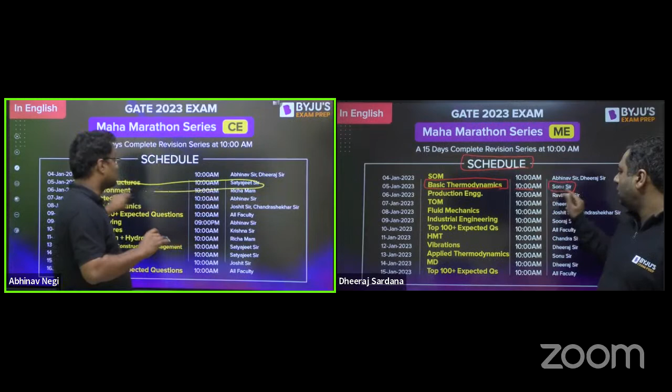Today we have taken the session, and tomorrow Sonu sir will be coming at 10 AM. Satyajeet sir will also be coming at 10 AM tomorrow for steel. Complete steel today, because 12 AM is already done, so it will be completed today, and Sonu sir's session will be tomorrow morning at 10 AM.

Now, after this, these are all the topics that we have covered, and from these topics only we will be taking the numericals.

But before that, the announcement of 2 students. Let me tell you, there are various students here - Deepak, Swapnil, Prashant, LSAT, Yadav, Negi Saab, Pratiksha, and various other students.

I have taken the screenshot. By the combined reason of me and Dheeraj sir, there are so many students - Akash, Priyam, Teju has given so many answers, Smart, Shashank, Banod, Dinesh - these are the students who got maximum answers correct. Revati, T Lover, Bhaumik, Tiksha, Umar, and various students here, more than 40, 50, even I cannot name them all.

They are all champions. To be very honest, I already told in the morning that we are not computers, we cannot even exactly calculate your time, but still, instead of one, me and Dheeraj sir have taken 2 students. You have to mail your details.

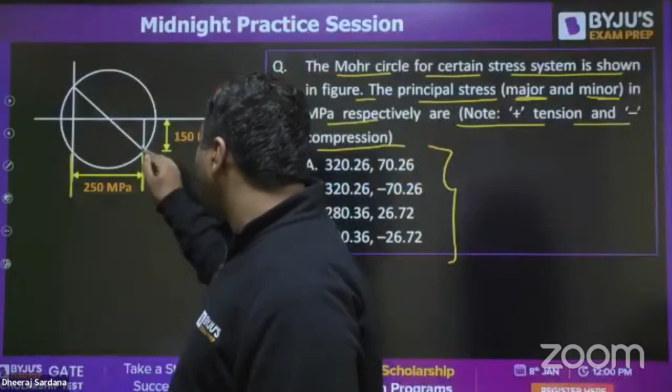So guys, here is the first question in front of you from the Mohr circle. This is the topic I have taken for the larger time today. You can see this Mohr circle is given to you, and the question states the Mohr circle for a certain stress system is shown in the figure. Find the principal stresses, that is major and minor, in MPa, with plus for tension and minus for compression. These are the four options. You can see this distance is given as 250 and this distance is given as 150. So you need to find out the principal stresses sigma 1 and sigma 2.

Let us see how many of you give the right answer. I am looking in the comment section. I feel some of you have started answering as well. Ashish Sharma is saying D. Hello Amir, great, great, thanks Ramesh Mohan. So Junaid is saying B would be the answer. Ashish Sharma is saying D is the answer. Okay very good, what about others?

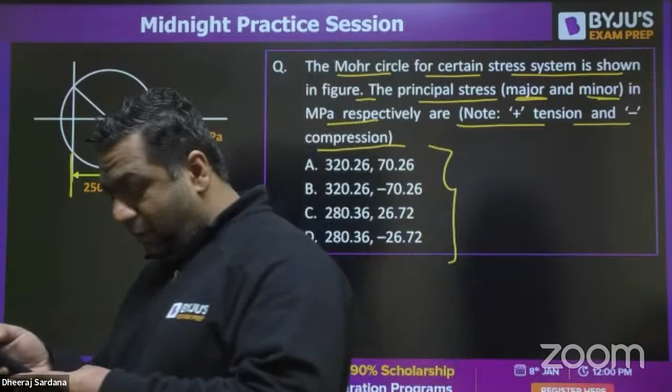Mekala Shekhar is saying B is the answer. Mayur is saying B is the answer. Kalyan is saying B is the answer. Deepak B, Minhas B, Sumit B, Vishal B, Adnan B, Akash B, very good. Manas very good, SK very good, Ramesh Mohan very good. So guys, majority of you have given the answer to be B. Some of you have also given A and D also. So I would like to say the B answer is correct.

So how will you be solving it? You know that if this distance is 250, obviously the half of this is going to be 125. So you can see this is the center of the Mohr circle. The center of the Mohr circle has the coordinate sigma star comma 0. So we know the value of sigma star, that is 125 MPa. So my dear, if we already know this, we need to find out the radius of the Mohr circle.

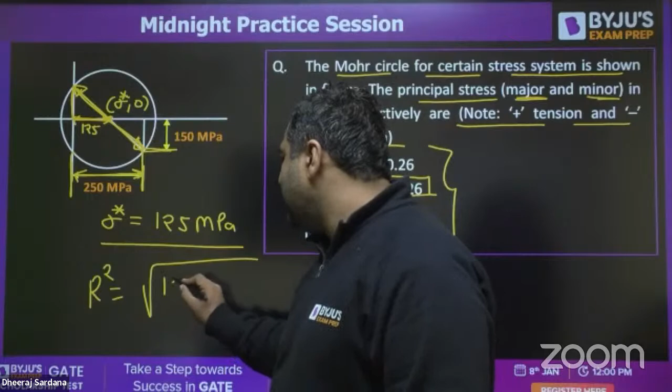So this radius we need to find out. You can also take this point, it's the same. To get this radius, you can use this triangle and apply Pythagoras. So r square is equals to 150 square... the height is going to be same because tau xy and tau yx are same. So we would write 125 square plus 150 square. After doing this, you would be getting the value... let me check... 195.256. So this would be coming out to be 195.256 MPa. This is the value we are getting for the radius. Square root of radius square, square will get cancelled out, and you will get this to be the radius of the Mohr circle.

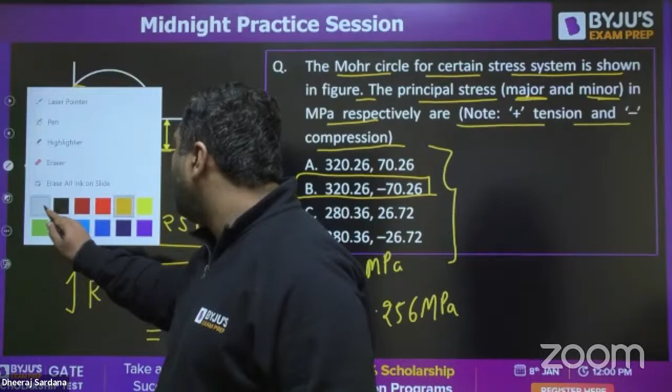195.256 MPa. So my dear, once we get the radius of the Mohr circle, you know what we need to do. If you add the radius to this 125, you would be getting the principal stress 1, because where the Mohr circle cuts the x-axis, you will get the principal stresses there. So the maximum principal stress you would be getting here. And similarly, if you subtract the radius from this sigma star, you would be reaching sigma 2.

Because the extreme point of the Mohr circle, where it is cutting the x-axis, will give us the principal stresses or principal plane. So sigma 1 would be sigma star plus radius, and sigma star minus radius - that also we have seen today.

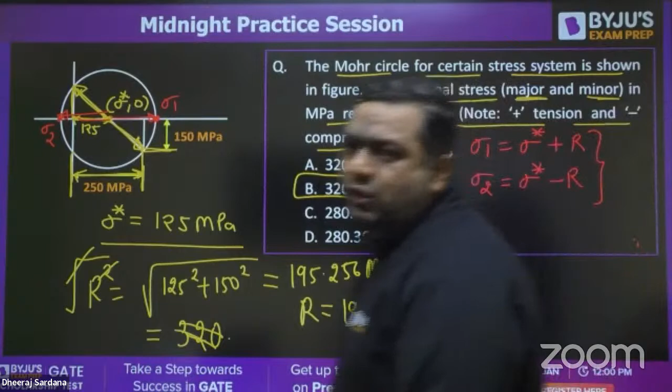So this is also a kind of check on what you have learned from today's marathon session. When you solve this, you would be getting 320.26 and the second answer is minus 70.26.

The student who has just a small idea that principal stress comes at the extreme point of Mohr circle will not answer it as A and C, because one principal stress is positive and the other is negative. So the answer could be either B or D. After calculation, we get to know the answer is B. Majority of you have given the right answer.

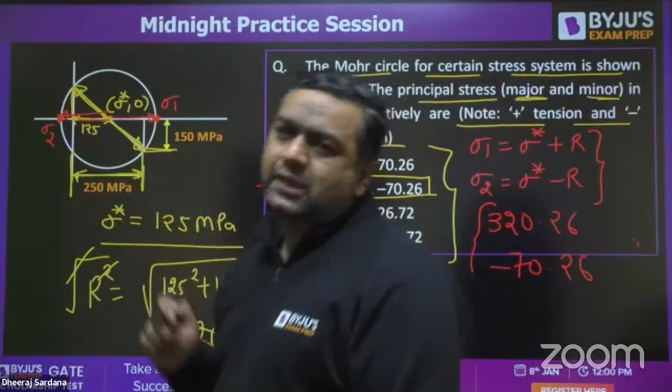So guys, let me check one more thing for this question. If I ask you whether the plane of pure shear will exist or not for this case, what would be your answer?

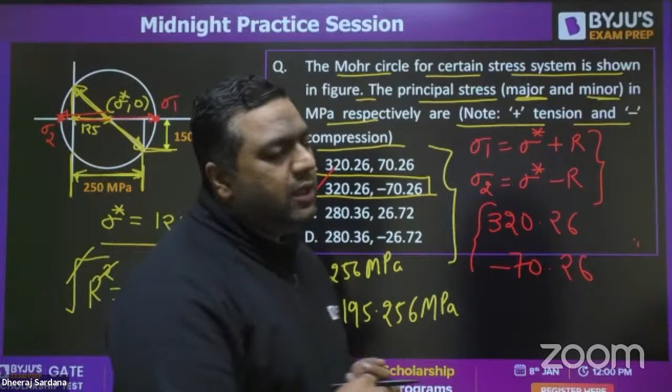As I already told you, if principal stresses are of opposite nature, then we are going to have plane of pure shear existence also. So everyone of you has given the right answer.

That's really nice. This is the second question from deflection, and after me, Abhinav sir would be taking the next two questions. This question has a cantilever beam where you need to find out the deflection at point A. This is point A, this is point B, and this is point C. You need to find the deflection at point A.

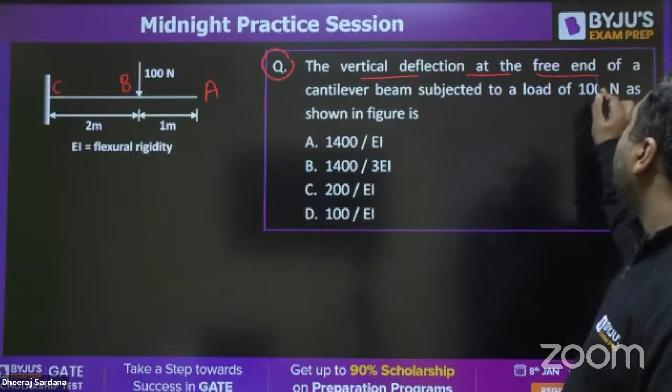So the vertical deflection at the free end of a cantilever beam subjected to a load of 100 Newton as shown in the figure. Let us see how many of you give the right answer for this.

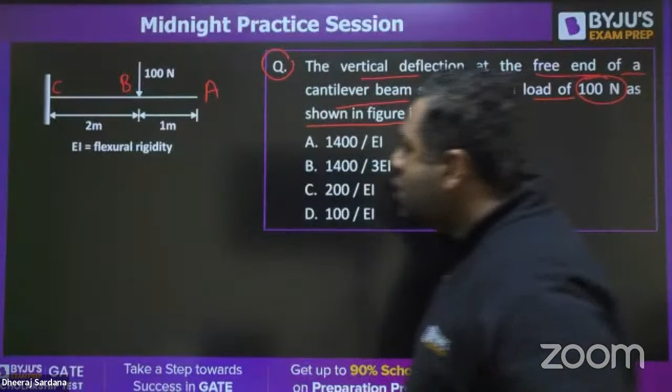So we are starting, guys, how to solve this question. You know that from A to B, there is no load. So if I ask you, from A to B, as there is no load, no bending moment is there. So the deflection diagram for AB is going to be a straight line. So if you say how the deflection curve would be made, it is going to be like this. As there is no load between A to B, we can say the slope of A equals the slope of B - yes, it is going to be.

So if you want to write the deflection of A, you can see the deflection of A has one component which is the deflection of B. To find out this part, we can write theta at B into AB. So you can say deflection at the free end will be deflection at B plus theta at B into AB.

As you know, when thetas are very, very small, we can definitely write them in this way. So when you put this value y at B, you can write this is going to be minus P, then the length for that would be BC, PL cube upon 3EI - this is going to be the first thing.

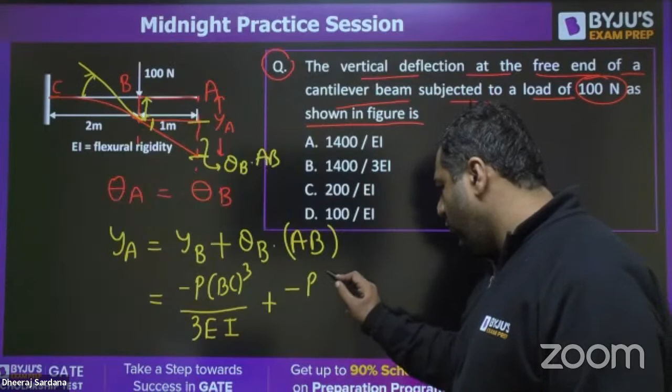Then you would be having plus theta B, that is minus. Why minus? The slope is going to be clockwise, and clockwise we consider as negative. So it's minus of PL square upon 2EI, and that is going to be into AB. So when you put the value of AB, BC, and the value of load, you would get the answer to be 1400 divided by 3EI. So B is the right answer.

I feel everyone has given the right answer, and I'm really happy with how you guys are answering. Very good, Abhishek, Mayur, Vishal.

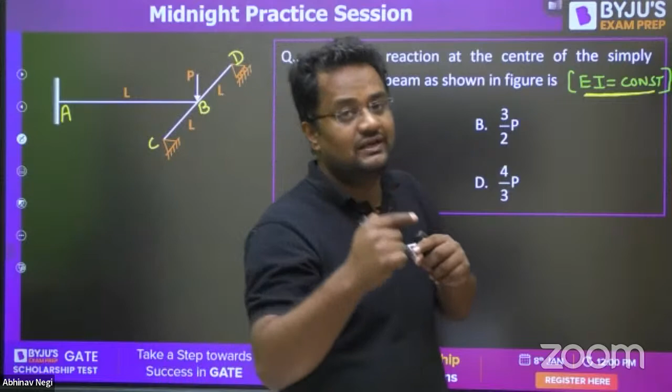Coming back to this question, as I told you in the session, deflection will be understood through the problem. So here, AB is a cantilever beam, and below this is simply supported. This is cantilever, that is AB, and this is simply supported. Now if I make the free body diagram of AB, EI is constant, then here is a P force on this.

This beam from the bottom is cantilever, and in the cantilever there is some force P. This hand is cantilever, and the simply support will push it upward. This will push the simply support downward - like I am putting 80 kg downward to the floor, and the floor is putting 80 kg upward. So here there is reaction R, and to beam CD, simply supported C and D, this R will be downward.

Now moving further, this point is in contact, so if this hand is going 3 mm downward, this point is also going 3 mm downward. The deflection of both these points where they are joined is the same. Now, deflection of B point - what is the deflection of B point? P minus R, length is L, cube by 3EI. Standard deflection formula for cantilever, PL cube by 3EI at the free end.

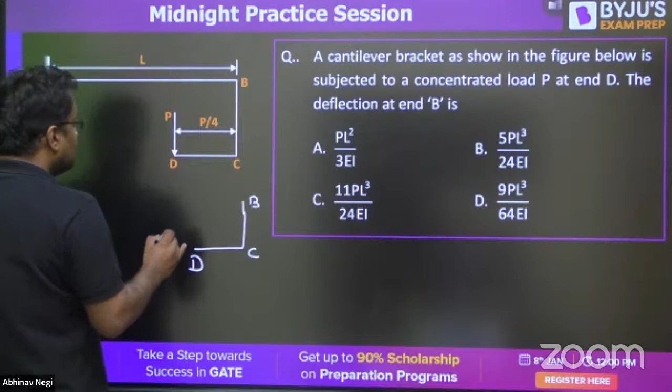Okay, this is P force and this is L by 4. When Dheeraj sir was solving the question, I found this misprint here. At that time I didn't know how to rub this, so I made it black color and did this. So this is L by 4.

So making it balanced, if I take this portion of the beam out, P force downward, so P force will be upward here as internal forces - morning I told you about internal forces. P into L by 4 here, so it will be P into L by 4 like this.

Now if I make the free body diagram of another part, AB - internal force, I told in the morning, is equal in magnitude and opposite in direction. So P upward, here P downward. And here PL by 4 is clockwise, so here PL by 4 is anti-clockwise.

As we know to do these kinds of things, no need to make two free body diagrams like this. We can directly shift it here, P downward. Moment is like this. Now what is asked?

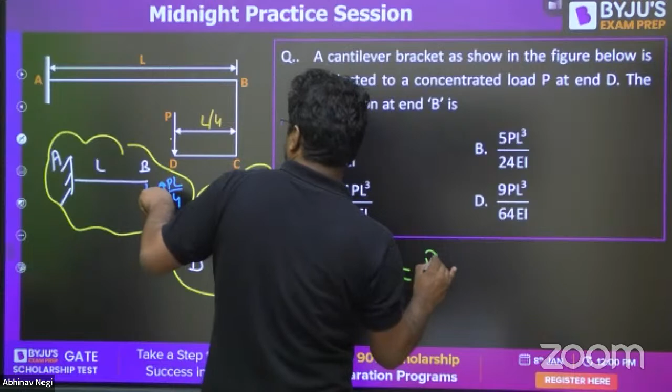Deflection of point B. Now deflection of point B due to this P is PL cube by 3EI. Please check, guys, when you're applying this formula, check if it is L, 2L, or 3L - not always PL cube by 3EI. If the length is 3L, then it will be 3L whole cube.

Now due to this moment, it is going upward. Due to this downward load it is going downward, but due to this moment it is going upward, ML square by 2EI. So minus PL by 4 into L square by 2EI.

Now what you do here, take PL cube by 3EI common. Now taking this common, here it will be 1 minus... take PL cube by EI common.

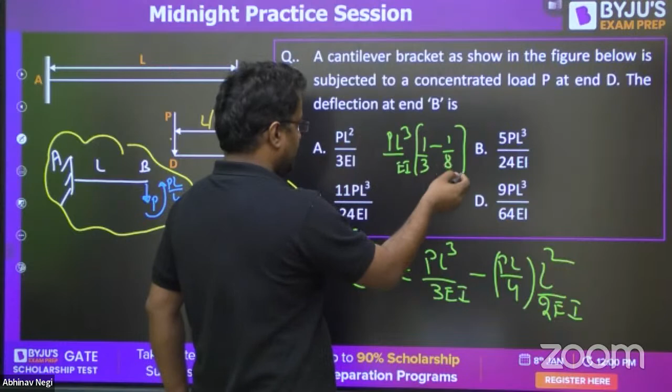So here it will be 1 by 3, and here it will be PL cube by EI common, 1 by 8. So 1 by 3 minus 1 by 8. LCM will be 24, so 5 by 24... yes, B option.

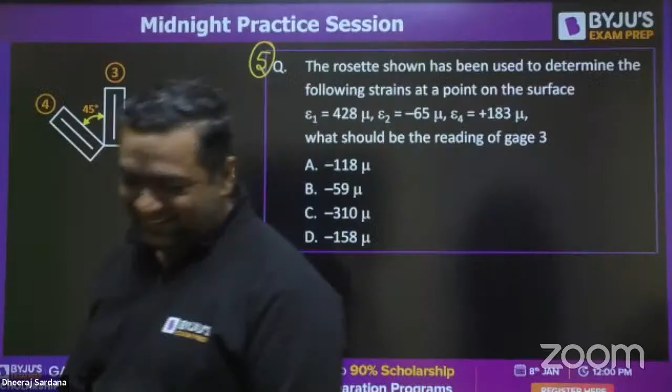Okay sir. Yes guys, what would be the answer for this question? This is question number 5, and this is from strain gauge rosettes. The rosette shown has been used to determine the following strains at a point on the surface. What should be the reading on gauge number 3?

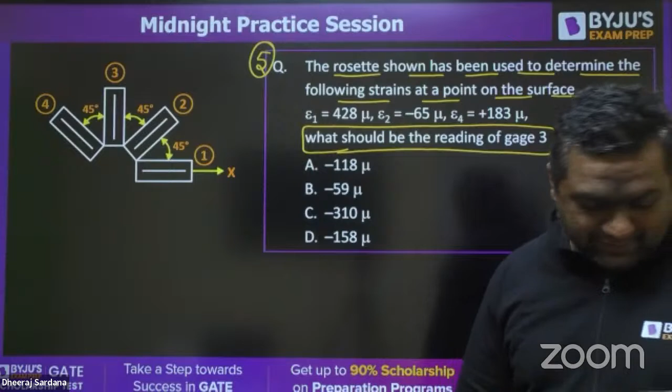Tell me the answer, guys, what would be the answer for this question? Govind is saying C would be the answer. Okay, Shubham is also saying C as the answer.

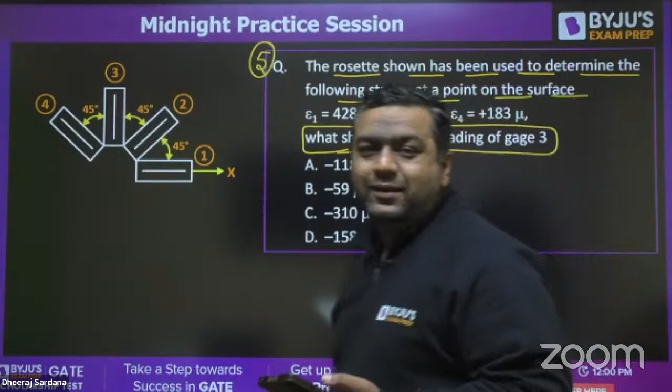Now please tell me, is the voice clear or not? Yes, that's right - Swapnil, very good. Mayur, Neeraj, Ajay, very well done. Yes, waiting for others, only 5 to 6 students have answered. Very good, Vishal Sharma, very well done. Great, Junaid, very good. Prince, very good. Mikala, very good. Yes.

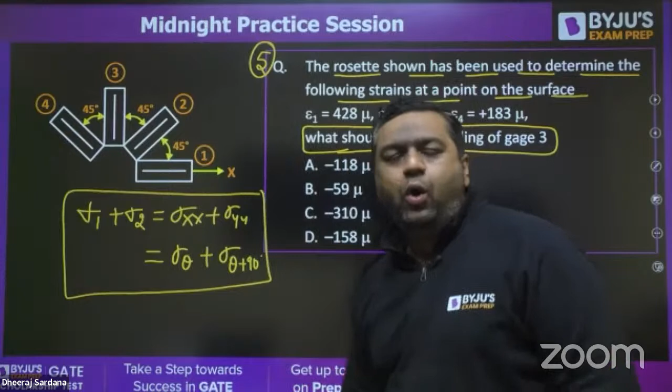So guys, when I was taking the Mohr circle and principal stresses part today, you have seen one thing, that sigma 1 plus sigma 2 equals sigma xx plus sigma yy, and then sigma theta plus 90. The summation of normal stresses on two perpendicular planes always remains constant. So here also, 1 and 3 are perpendicular, 2 and 4 are perpendicular.

And you know, every relation we have derived for stress is valid for strain also. For normal, you can directly replace sigma by epsilon. And for shear, you can replace it by gamma by 2. So you can write epsilon 1 plus epsilon 3 equals epsilon 2 plus epsilon 4, because 1 and 3 are perpendicular, 2 and 4 are perpendicular.

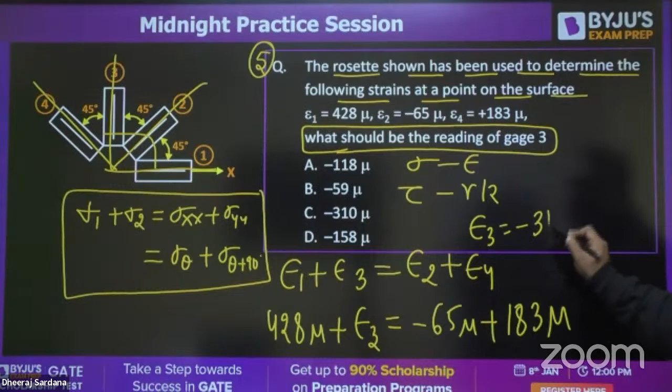So epsilon 1 is given as 428 microns. Epsilon 3 you need to calculate. Epsilon 2 is given as minus 65 micron, and epsilon 4 is 183 microns. So you would be getting epsilon 3 to be minus 310 micron. It was an easy question if you know this wonderful concept. That is why I was saying it is going to be very important, and you need to be ready for that.

Wonderful. So votes are also there. Great, great, great.

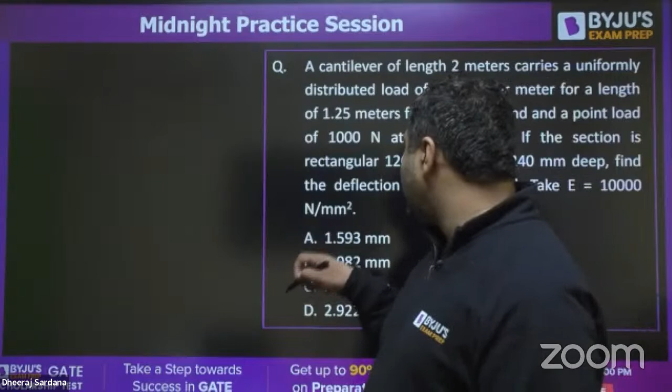This is question number 5. So moving to question number 6. Guys, I feel this question is once again from deflection, question number 6. So as deflection sir has promised, we are fulfilling the promise. One more question is there.

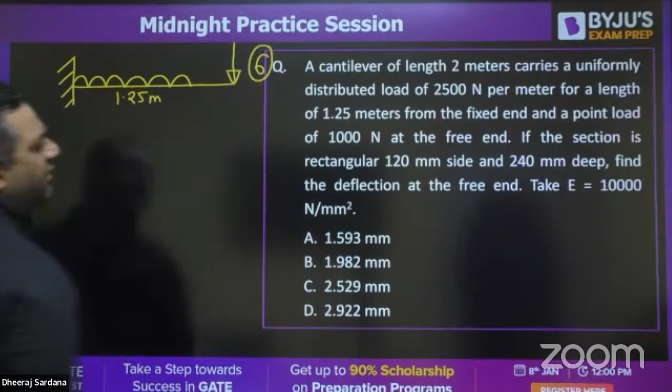A cantilever of length 2 meters carries a uniformly distributed load, a UDL like this, of 2500 Newton per meter for a length of 1.25 meters. It is also having a point load of 1000 Newton at the free end. This is nothing but 2500 Newton per meter, given to you. And they are saying if the section is rectangular, where 240 is the depth and 120 is the width, you can find I is BD cube by 12, and if you want to find Z, that is BD square by 6.

They are asking to find the deflection at the free end. So you can see here we need to apply which method, which principle, and just do it. This is slightly more calculative, but this type of question comes from deflection sometimes, so for that purpose we have taken this.

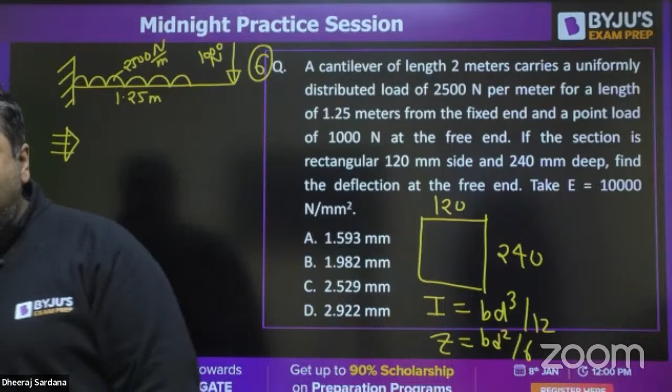Ajay is saying the answer to be B. What about others? So my dear, I would like to give you a hint there. You need to apply the principle of superposition. First of all, you need to find out deflection due to this force P, which is 1000 Newton.

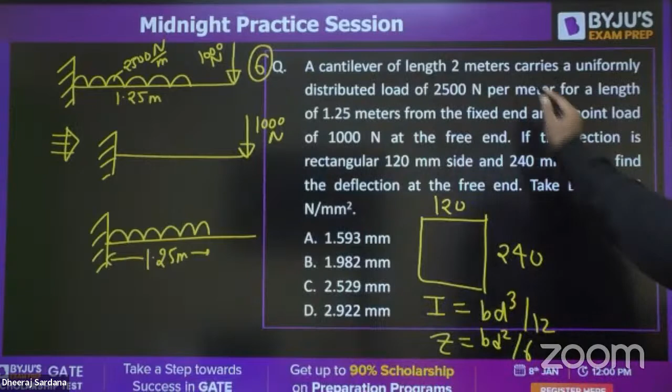Then you need to find out the deflection due to this UDL, for a length of 1.25 meter, and the total length is mentioned as 2 meters. So obviously for the rest of the length, 0.75 meters, there is nothing. You need to find deflection at A because of this point load, then deflection at A because of UDL, then take the summation of that. That is called the principle of superposition.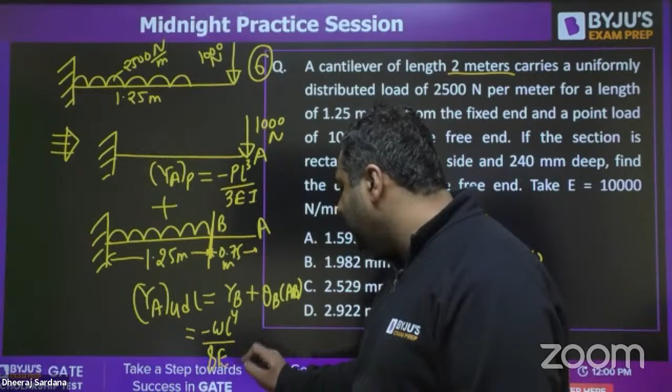Here you would be using minus PL cube upon 3EI, that is the formula. And once again, this is similar to the previous question I have taken. If this is point A and this is point B, you write this as deflection at B due to UDL plus theta at B into AB. Due to UDL, it is minus WL4 upon 8EI, and minus WL cube upon 6EI, into the length, which is AB. But I would like to say for this length is 2 meters, but for this length is 1.25 meters. So this question will give you a feel of the convention the student was asking for. Just solve it.

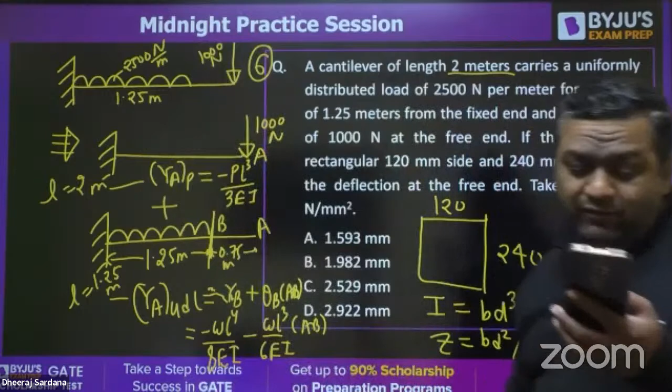Wonderful, I feel some of you have already answered it. Great, great, great, Ajay, I feel you found your mistake. So guys, you are doing really fantastic. The time which I have used to write the formulas, you have just calculated, and I would like to say everyone, the answer is correct. 2.922 is the right answer. Everyone has given the right answer, so that's really fine.

So this was question number 6. So I feel Abhinav sir, your turn has come.

Okay guys, this is a previous year question, but I'll modify it a little bit. Here, this is the shaded portion, and it is asked what is the force here, but I'll just modify it slightly.

First, if I draw the bending stresses, this is causing compression at the top. So the neutral axis will be the centroidal axis. This is 150, so neutral axis will be here, this is the neutral axis, the centroid. Above is compression and below is tension.

Now we want to find the force here. So what is force? Force is stress into area. What is area? Area is 25 into 50.

What is stress? At this level the stress is somewhere here, sigma, and at this level stress is 0. So it's 0, then increasing gradually until sigma. So it will be 0 plus sigma by 2. Since it is linear variation, only then can we do this. Otherwise we'd have to find the volume of the stress prism. So it's 0 plus sigma by 2 into this.

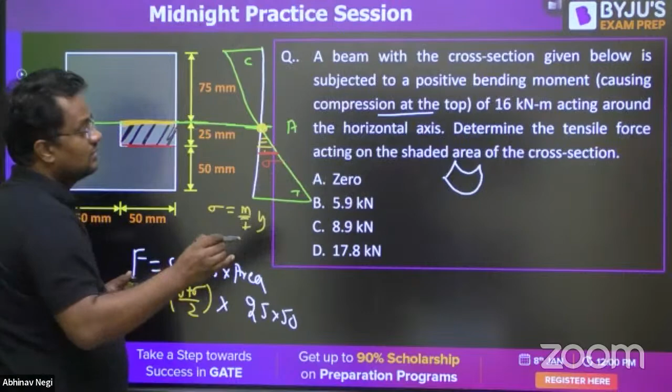So what is sigma? I told you in the morning, M by I into y. What is M? M is this. What is I? BD cube by 12. So B is 100 and D is 150, cube, by 12. And y is the distance from the neutral axis, y is 25. So sigma is M, that is 16, I is BD cube by 12, converted into proper units, into y which is 25. From here sigma comes out to be 14.22 Newton per mm square, and this value you will get as 8.9 kilonewton.

This is a PYQ, I wanted to change it a little bit, so I am changing it. I want to find out the stress at this dotted portion now, not the shaded portion. I want to find out the stress here in the dotted portion.

Can you do this? Yes or no? Just tell me, I'm not asking for the answer yet. Can you do this? Again, the force is stress into area. Just let me know in the comment section. So area is, this is 50 and this is 50, area is 50 into 50.

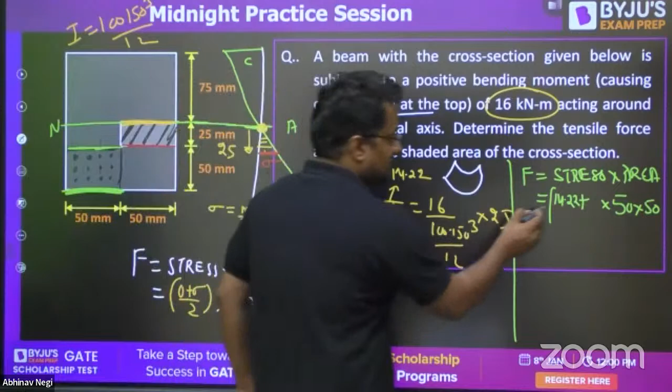And stress, guys, here at this level the stress is 14.22. At this level it is sigma max. So it will be sigma plus sigma max by 2, like this.

Are you getting this, in this 50 into 50 area? Here the stress is 14.22, that is sigma, and here the stress is sigma max. You can find this by similar triangles also, by 2 into area, or you can find it by this formula.

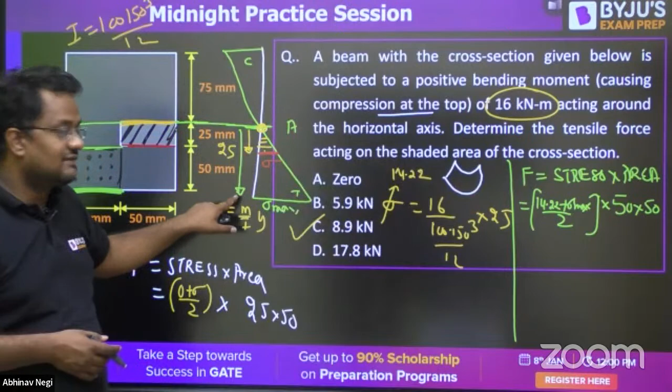M by I, M is same, I is same, but y here is 75. So it will be 3 times, because here I was multiplying with 25, M same, I same, and here I'll be multiplying with 75, or by similar triangle you can find the value. Got the concept, guys? Everybody, have you got this?

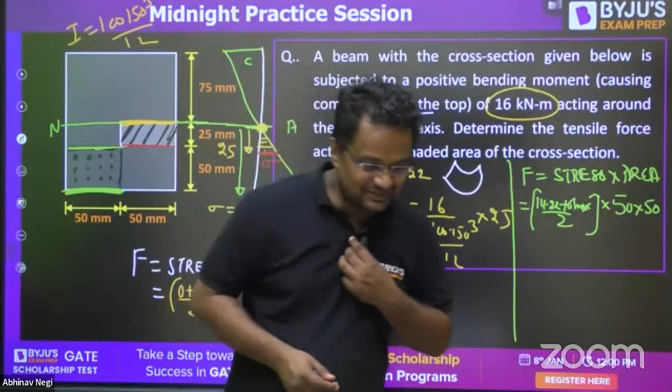Okay, now moving here to the next question, as we promised that we'll be doing more deflection questions.

This is A, this is B, this is A, this is B, and here this is C.

Like this, this is B, and this is C. Now this will be pushing reaction here upward if I break it, and this will be reaction R downward. But point B is same. So in this part...

What is deflection of B due to UDL? W L4, L is 4a. 4a to the power 4 by 8EI minus RL cube by 3EI. R will be pushing it upward. RL cube, 4A whole cube by 3EI.

This is equal to, in this part, what is the deflection of B? Downward I am taking as positive, upward I am taking as negative.

So this R is downward. Here the only mistake students make is in sign convention. R is PL cube by 3EI, I am again saying downward. This W is putting it downward, so I take it as positive. This R, the upper R, is putting it upward, so I have taken it as minus. So in this green portion, this R is putting it downward, so plus, and this W is also downward.

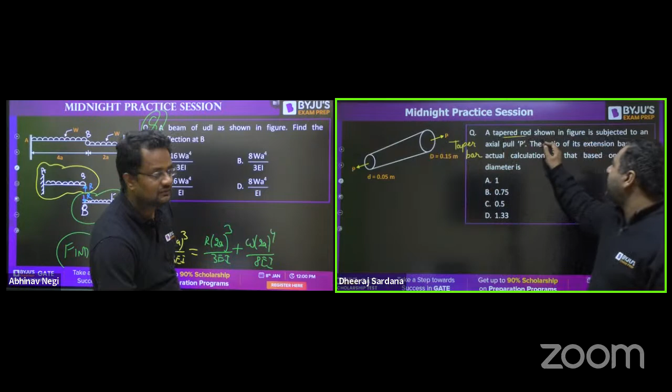So guys, let's change a bit now, enough of deflection. Now let us see the question on the taper bar. This is the question from taper bar: a tapered rod shown in the figure is subjected to an axial pull of P. The ratio of its extension based on actual calculation to that based on average diameter - find the ratio of delta taper to delta prismatic.

There are two considerations. One is in front of you, that will give you delta taper, and the second, by mistake, if we consider a prismatic bar of average diameter. What do you mean by average? If this diameter is D1 and this is D2, average would be D1 plus D2 by 2. So you need to find out the elongation.

Today only you have seen this concept also in the morning session. So let us see how many of you give the right answer for this one. Great, wonderful guys, I feel majority of you have already answered it.

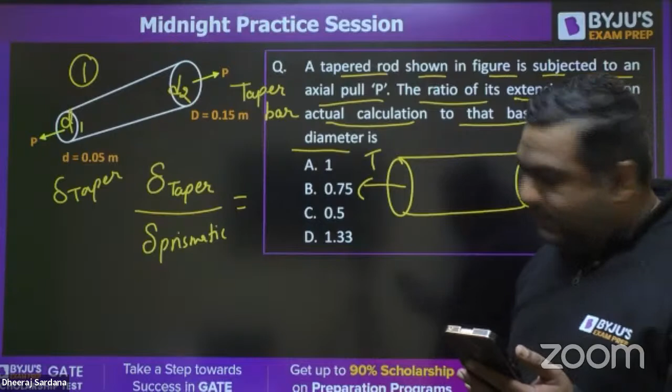A, very good. Ajay is saying D. Some are saying A, some are okay - A is for the previous one. For this, the answer is D. Very good, wonderful - Manas, SK, Vishal, Swapnil, Mayur, Ramesh Mohan. Very good, I feel everyone has given the correct answer. D is the right answer.

So you know the formula for delta taper - it is 4PL upon pi E D1 D2. And you know the formula for delta prismatic - it is 4PL upon pi E D square. So guys, you need to take the ratio of them. Load is same, length is same, and only the difference is in diameters, where D1 and D2 are given to you.

D1 is given as 0.05, D2 is 0.15. And what would be the average diameter? Average diameter would be 0.05 plus 0.15 divided by 2. So the ratio comes out to be 4/3. D would be the right answer.

Really wonderful, guys, very good. Majority of you have given the right answer. Very good Neeraj, very good Manas, SK, everyone.

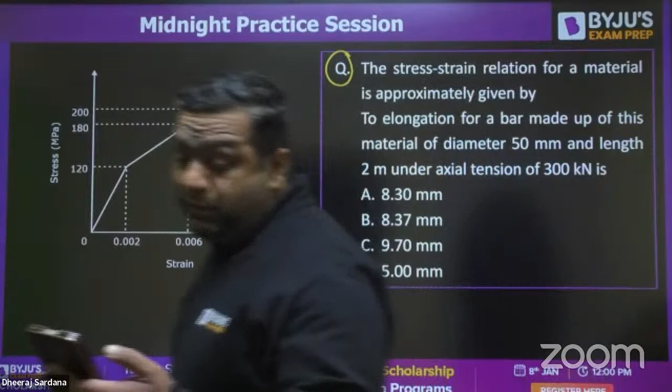So guys, now this question I have taken 2 to 3 times before also, but my dear, from the stress-strain diagram, it is the best question I found. That is why in this session also we are doing it, because this type of question has appeared in previous years' GATE questions also. So guys, this is a wonderful question, let us see how many of you are able to answer it.

The stress-strain relation for a material is approximately given by this. Then he is saying to find the elongation for a bar made up of this material, of diameter 50 mm and length 2 meter, under axial tension of 300 kilonewton.

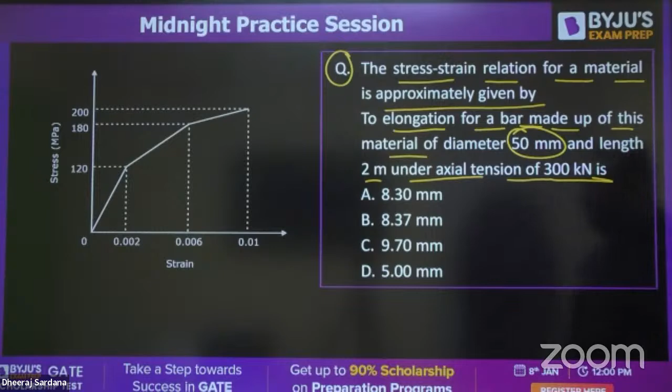So my dear, you need to solve, you need to find out the elongation. Let us see how many of you give the right answer for this. Those who know the concept, they can try. Those who do not know, I am telling here. First of all, find out the value of stress, which is force by area.

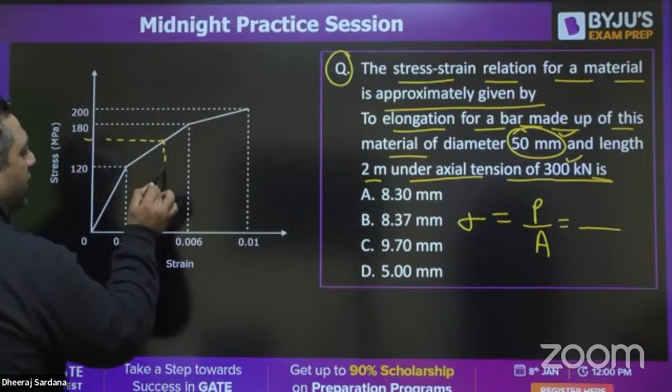They have mentioned the load, they have mentioned the diameter. You can find out this value of stress. This value of stress would be coming somewhere here. Corresponding to that, you would be having this strain also.

Then my dear, you can use the similar triangle concept where you are having two triangles. One triangle is this yellow one and other triangle you are having this green one. So using this, you know this value, you know this value, you can find out this one. So once you get this one, you can find out the total value of strain.

So once you would be getting the total value of strain, then delta L upon L is the strain. You can use it and you can find out the deformation also. How you can find out, because this is known to us now. So you just need to find out this, then you can add this one. So just to solve it, guys, and you would be getting the answer for that.

Let us see how many of you give the right answer. So I have given the concept. Very good, Deepak has said the answer to be 8.37 mm. What about others?

So guys, you guys are really doing nice. Vishal Sharma is also saying the answer to be B. What about others? Manas, SK, Swapnil, Shubham is also saying the same. Swapnil same, Neeraj same, Shubham also same. Very good, guys. Very good. So Mayur, are you trying it or not? SK, very good, very nice job. Ajay, very good, guys. Very good.

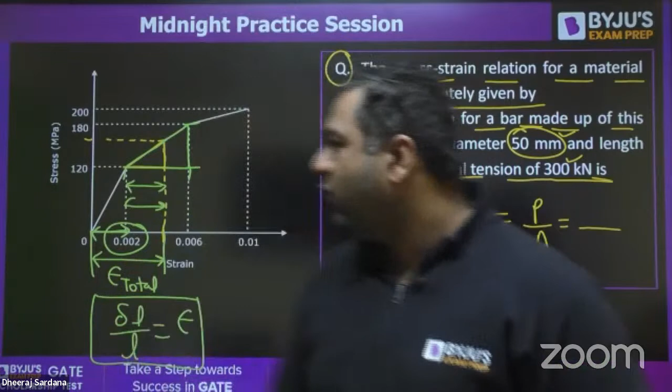So first of all, when you would be finding out this value, sigma, you would be getting a value around 152 or 153. After getting this value, you can use the similar triangle concept and you can find out this strain. Once you get this strain, you can add this 0.002 into that. You can find out total strain. After that, you can find out the length and you would be getting the answer to be 8.37 mm. So that answer is really correct.

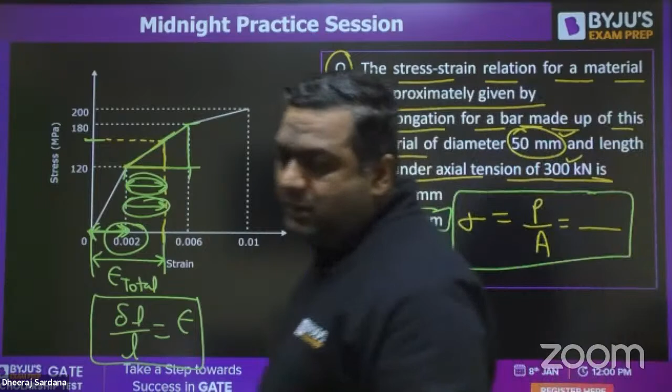Very good, Junaid. So I feel, sir, I have done these two questions. Now, once again, it's your turn.

So from where will the upward reaction come? Okay, so guys, from where will the upward reaction come? There is no support, no simple support, no fixed support. So guys, the upward force will be coming from the buoyancy, the water force, the water thrust, that will be acting as a UDL. And if this total is 80 Newton, okay, so this UDL will be over 2 meters. So this UDL intensity will be 40 Newton per meter. If it's 40 Newton per meter, then only in 2 meters, it will be 80 upward.

Then balancing. Now, if I make the SFD for this, guys, you can see my method and Dheeraj sir's method, both are the same, just in a different way. It's something like you are saying Delhi or Dilli, both are same. So you can see my method or sir's method, both are same.

So UDL is upward. Those who have studied the AN method, SFD, BMD from me, positive and constant, positive and constant like this. Then downward load, shear force will fall. Then upward load, then upward UDL, so positive constant like this. Now this is the SFD and BMD will be.

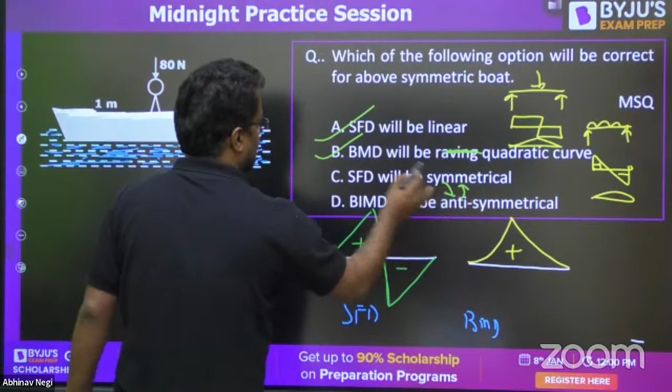Okay, like this. SFD is anti-symmetrical, plus here, minus here, while BMD is symmetrical. This is an MSQ question. Yes, SFD is linear, so BMD will be a quadratic curve. SFD will be anti-symmetrical and BMD will be symmetrical, so only options A and B are correct, not D. BMD is not anti-symmetrical, it is actually symmetrical.

Now, what happened to my marker? Okay, 2, 2, 2. Now, compliance. Just give me quick answers. Again, one MSQ, guys.

Yes, tell me, this is, I guess, question number 12. Okay, sir has taken 6 questions, and this is my 6th question. This is question number 12. Okay, compliance was guys, stiffness.

See, delta is PL by AE, so stiffness is P by delta, which is AE by L. Compliance is flexibility, the opposite of that, the reciprocal, so it will be L by AE. So it depends on length, not load. It depends on length, A, and E. That is B, C, and D. This is question number 12.

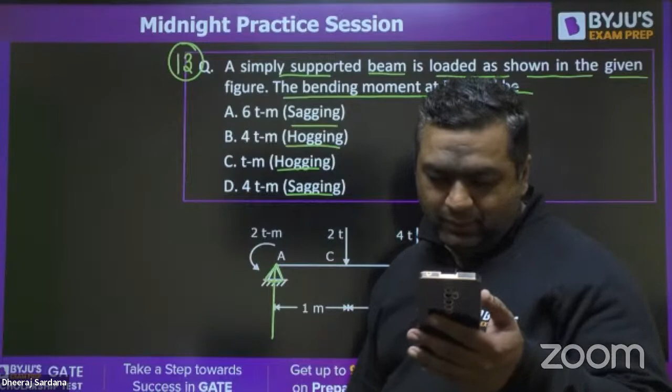Okay, Mayur. So I was thinking, Mayur, you are from civil, but you are from mechanical. That's really great, so you can continue this series with us in the marathon series. Okay, civil, Mayur is saying 4 TM.

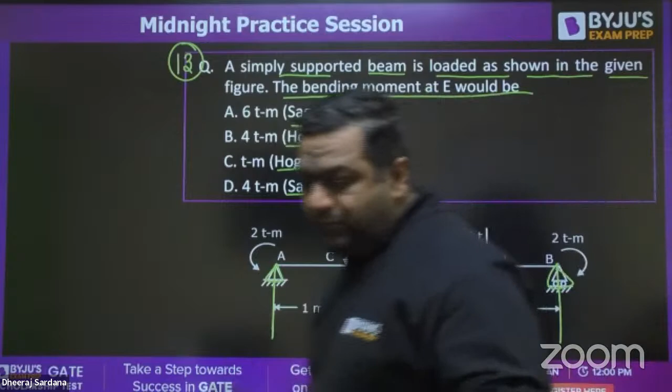So guys, some of you are saying the answer to be D. Everyone is saying D, okay. So guys, first of all, we will be finding out the support reaction. So you know the principle of superposition, you have seen that this 2 TM is making the net moment to be 0, so there would be no reaction because of it. Now we are talking about this 2T, 4T, and 2T.

If you would be finding out the support reaction RA, we are going to use the shortcut. RA is upward, 2T is downward, so you would be writing plus sign 2T, the distance from the opposite end is 3 divided by 4. Then you would be having the second 4T, once again it is upward, it is downward, so you would be saying 4T into the distance is 2 divided by 4. Plus the effect of 2T, you would be having 2T into 1 divided by 4. And you know there is a kind of symmetry also, because of that both reactions are going to be equal, so you can see here 4 is there. 2 into 3 is 6, plus 8 is 14, plus 2 is 16.

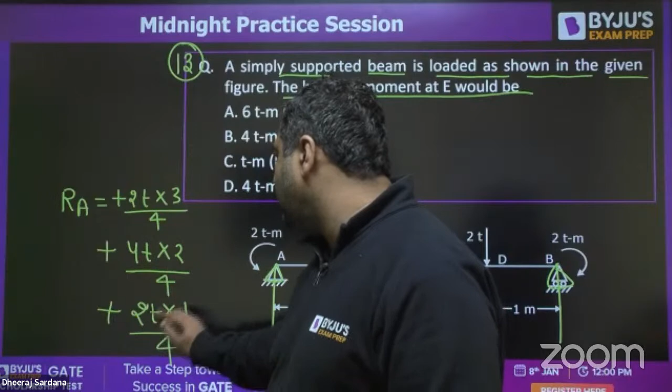So you are going to get RA. You can also write by symmetry RA equals RB. This is 4 plus 4, 8. So directly it could also be written, but I have shown you both the things. Every time symmetry may not be there. So if symmetry is there, you can directly write that the total load would be divided into 2 parts. But if symmetry is not there, you will go by this method.

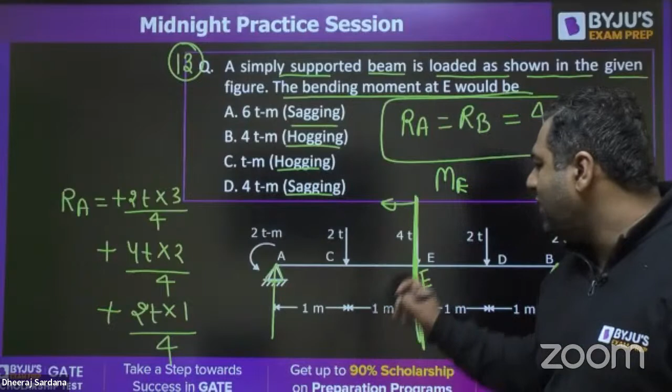So you would be getting 4, 4, and you need to find out the bending moment at point E. If you want to find the bending moment at E, you can take it either from the left or the right hand side of the section. Consider the sign convention: this is for sagging, this is for hogging. So you can see this is hogging, so I would be having this to be minus 2T, minus 2TM.

Yes, if you see from the left, this RA would be creating clockwise moment, so you would be having 4T into 2, so plus, this is going to be 4T into 2, so 8TM. And you would be having one more, this 2T would be creating hogging once again, so 2T into M, so it is going to be minus 2T into M. So the total value would come out to be 4TM.

Positive means sagging, so the answer is D. Really very good, guys. Everyone has given the right answer, I feel.

Yes, Ramesh Mohan, the same I said, by symmetry also we can do it. This is from principal stresses once again, from the Mohr circle. So on the element shown below in the figure, the stress in MPa, the radius of Mohr circle is R and principal stresses are sigma 1 and sigma 2.

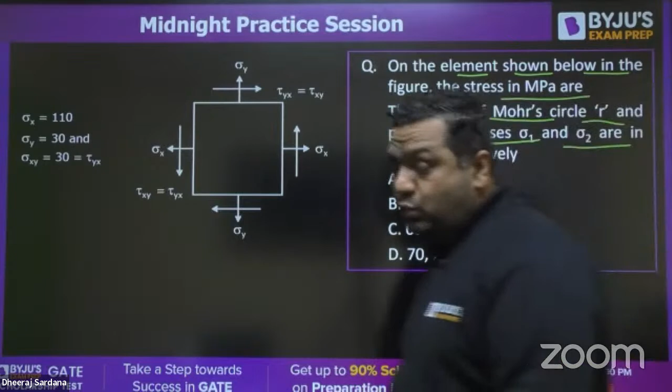This will be a very, very easy question. You are having 4 options, but in GATE every year they are asking from radius of Mohr circle, so taking that into mind I have put this question. Otherwise I know it is easy, but in GATE it is also coming, so we need to prepare for the exam. So tell me what would be the right answer for this.

Yes, very good Ashish Sharma, very wonderful, guys, wonderful. Yes, Teju is saying A. Easy way is saying A. Ramesh Mohan A. Mayur A. Manas A. Ajay A, very good. Shubham A, very good. Wonderful, guys.

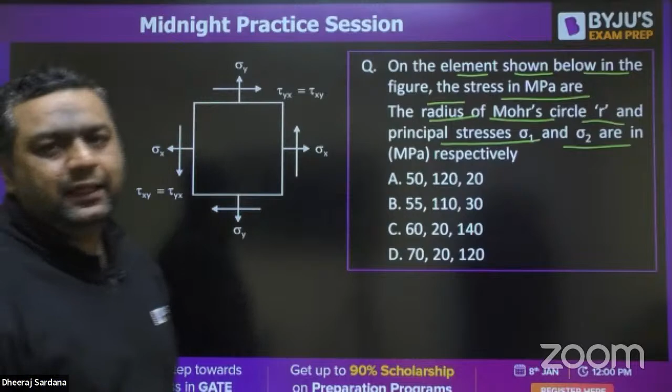Okay, so guys, now I would be telling you how to solve it. Abhishek, Vishal, very good. You can see you are given sigma x as 110, and sigma y as 30, and tau xy also as 30. So guys, the best thing to find out is the radius of Mohr circle, because it is nothing but tau max. And everybody would be remembering the tau max formula from today's session also: sigma xx minus sigma yy by 2, whole square, plus tau xy whole square.

So guys, if you have 110 and 30, you put the value: 110 minus 30 by 2, whole square, plus tau xy which is 30, whole square. The answer comes out to be 50. So if you want to answer only with the radius, you can say the answer is A, because there is no other option which has 50.

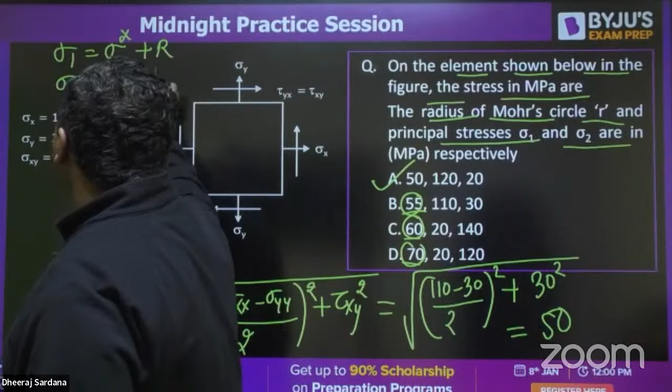But if any other option also has the value 50, then you need to find sigma 1 and sigma 2 also. You already know how to write sigma 1 and sigma 2: sigma 1 is sigma star plus radius, and sigma 2 is sigma star minus radius. And sigma star can be written as sigma xx plus sigma yy divided by 2. So 110 plus 30 is 140, divided by 2 is 70. So you can write this as 70 plus 50 is 120, and 70 minus 50 is 20. So the answer is A finally. I have shown you the calculation for everything.

So I feel this was question number 14. Okay, now Abhinav sir would be coming for question number 15, then I would be coming for other questions. Yes, Abhinav sir.

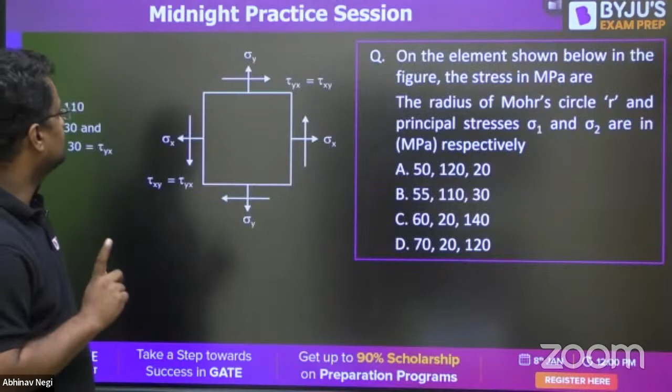The cross section of a beam is shown below, Ixx is this, it is subjected to load as shown in the figure, find the maximum tensile stress. Okay, first of all this is the question — first, draw the shear force diagram.

This is 0.3, it is symmetrical, so both will be 0.3, 0.3. This is SFD, SFD is anti-symmetrical. Now if I draw BMD — negative and constant, graph number 4 as per the AN method, then positive constant like this. So this is the maximum bending moment: 0.3 into 3 meter, 0.4 into distance, giving 0.9 kilonewton meter.

Now what they are asking is the maximum tensile stress, so sigma max as per the flexure formula is M into y max by I.

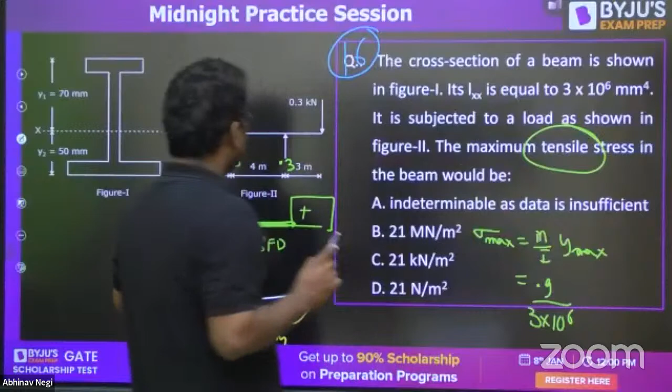So for maximum, I will be putting maximum bending moment 0.9. What is I? 3 into 10 to the power 6. What is y max? They are asking the tensile stress. So it is a hogging bending moment. Negative represents hogging bending moment. Hogging is like this, so tension is at top, here it is tension, here it is compression. So what is the maximum?

We will be finding y of here, not of here. Even here y is more, even here this is only more. But if here it is 90 mm, then only we'll be taking this, because they are asking the tensile side stress. So tensile side y max is 70. Even if here y max is 90, still we'll be calculating this. So this into 70 in proper units, in Newton, mega Newton is 10 to the power 6, you can find the answer. I'm not going into the calculation, guys.

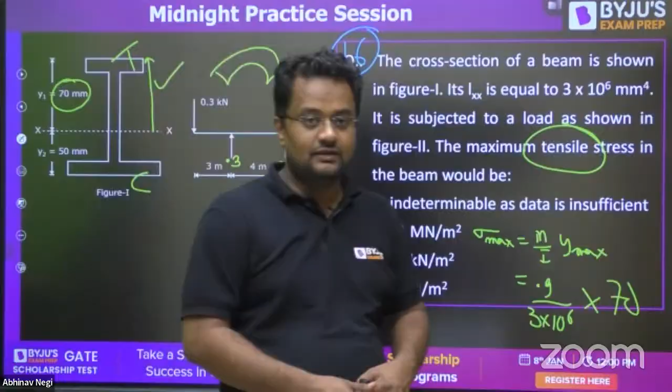Yes sir, so guys, now next question is from columns. Our promise is we'll complete all the topics. So now let's solve the question from column, that is from Rankine load.

So they have given you the Euler load as 1000 kilonewtons, and the crushing load is equal to 1500 kilonewton. You need to find out the Rankine load. So I feel everyone would be knowing that 1 upon PR is 1 upon PE plus 1 upon PCR. If you know this relation, you can very easily find out the Rankine load. This is from column and strut, so you can have this type of question.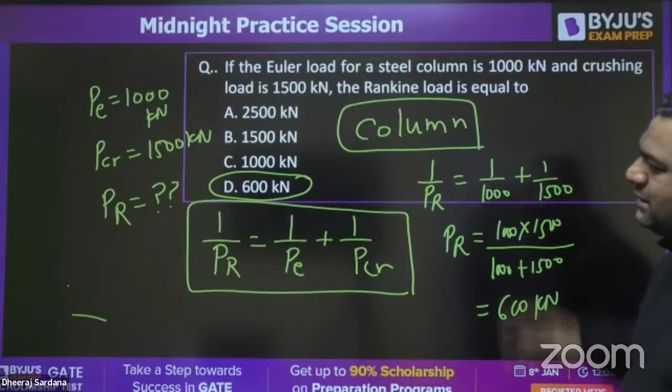So guys, the answer for this is going to be D, that is correct. So you would be having 1 upon PR equals 1 upon 1000 plus 1 upon 1500. So I feel you know the formula for PR would be 1000 into 1500 divided by 1000 plus 1500. The answer would be 600 kilonewton. So wonderful guys, the answer would be D for this question.

Moving to question number 18 now. Question number 18 now is from torsion. So covering all the topics, guys.

Manas, I is BD cube by 12 and Z is BD square by 6, we are talking about XX axis when depth is along the Y. Two shafts having same length, so L1 is equal to L2, same material, G1 is equal to G2, are joined in series and they are subjected to a torque of 10 kilonewton meter. If the ratio of diameter is 2:1, then the ratio of their angles of twist would be - you need to find out the ratio of theta1 to theta2. I feel everybody knows theta is given as TL upon GJ.

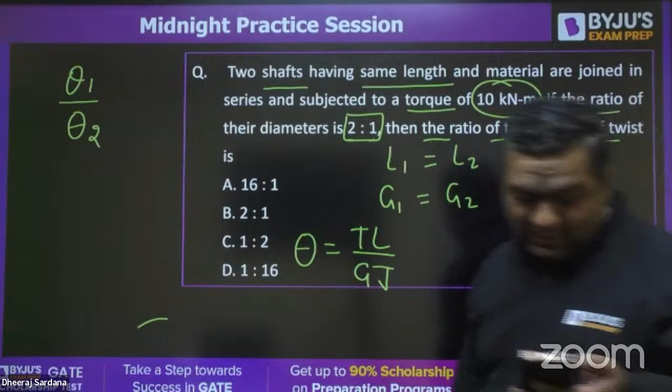This type of questions are more coming in GATE for 1 mark, 2 mark section from torsion. Okay, Teju has given the answer to be D. Very good Mayur, yes. Ramesh Mon is saying D. Mayur, very good, Swapnil, Ashish, SK, very good.

Ashish, very nice guys. So when you solve this, you know theta1 by theta2 - this ratio you need to find out. So theta1 ratio would be T1 L1 upon G1 J1 and T2 L2 upon G2 J2. Since they are subjected to same torque, length is same, material is same, everything will get cancelled out. This would be J2 by J1. So J2 is going to be pi by 32 D2 to the power 4 divided by pi by 32 D1 to the power 4. So D2 to the power 4, D1 to the power 4 - the ratio of D1 and D2 is 2:1, so it's coming out to be D2 by D1 to the power 4, which is 1 by 2 power 4. So I feel D is going to be the right answer for this.

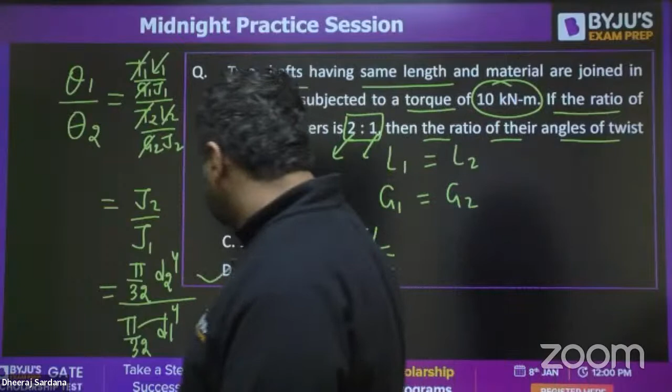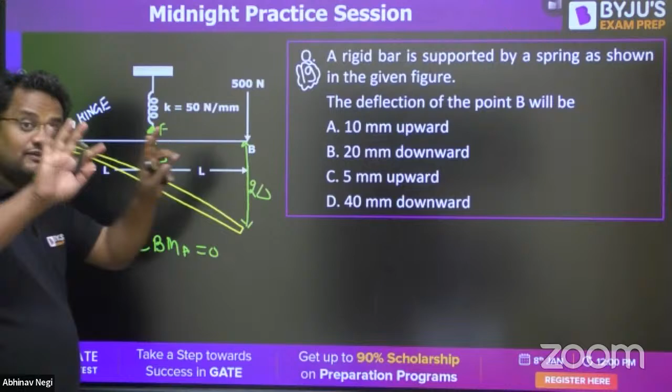Now, since guys, this is a hinge, the spring is pushing it upward by F force. So summation of bending moment about A is 0. At hinge, bending moment is 0. Moment is everywhere 0, guys. Bending moment is a different thing, moment is a different thing.

Just give me 2 minutes, I'll make you understand. Many times in interviews I ask somebody: this is P, this is L, this is B, this is A. What is moment at A? Please let me know in the comment section.

Okay, let me check what students are saying. What is moment at A? Mayur is saying P into L. Ajay is saying P into L. All are wrong. Moment at A is 0.

Bending moment is PL. Bending moment you see from right hand side is PL, and these are the reactions. From left hand side also it is PL. So bending moment at A is PL, from right and left also. But moment at A is 0.

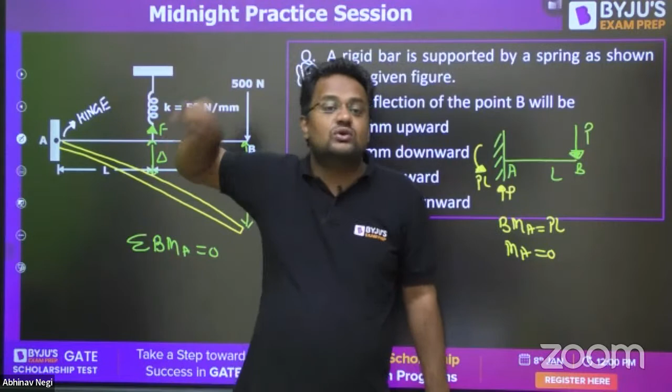Guys, moment at every point of an equilibrium body has to be 0, otherwise it will be rotating like this. Moment is calculated from right also and left also - right PL clockwise, left PL anti-clockwise.

Guys, even moment at every point in an equilibrium body is zero. If at this point C, the distance is x and that distance is L minus x, then moment at C: P into x is clockwise, this PL is anti-clockwise, and then P into L minus x is clockwise. Moment is taken from left and right both, so this is again zero. Moment at every point is zero.

If you still haven't understood, let me tell you one more thing, it is the same, now you will all understand. If this is P force, this reaction is P, so at this section net force is zero. Net force is calculated from bottom also, top also. At this point net force is zero, otherwise it will be accelerating, it will be going to Khandala.

Moment is always zero. So bending moment from right hand side - 500 into this distance 2L, and moment will also be zero here. So 500 into this distance 2L, and this F into L is equal to 0. So F is equal to 1000.

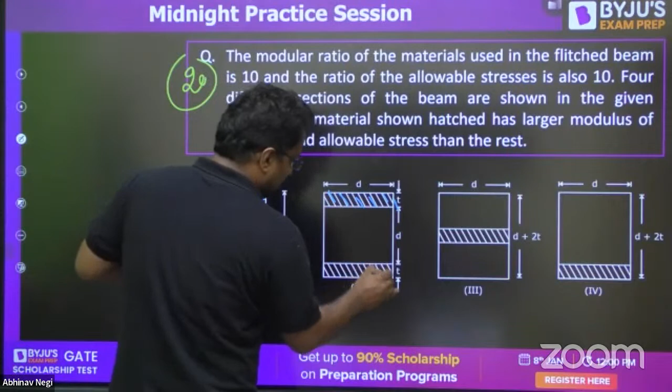This blue one is steel. Steel is stronger, and Young's modulus of steel upon Young's modulus of wood is given as 10.

Now, 4 different sections are there. The material shown, one is larger, that means steel. The question is which is the strongest section in bending?

And let me add one more thing: which is strongest in shear?

In bending it is quite obvious this is worst, because bending stresses are like this: top and bottom more, and at the center very less. Where the stresses are minimum, they are putting higher standard, good quality, stronger material there - worst design by a worst engineer.

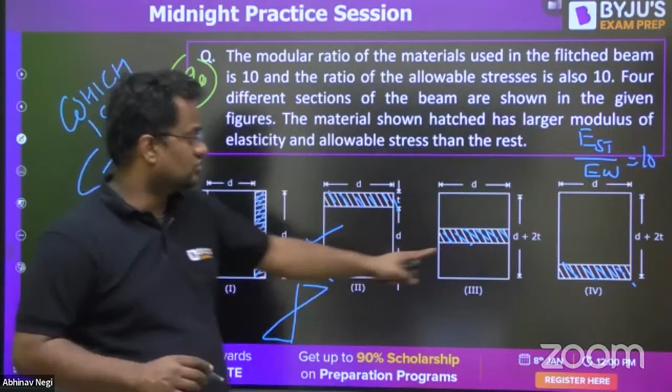The best design is this one. Even this is also not best, because on one side they have provided good material, another side they have not. It is not mentioned as ductile or brittle material. So the best is this - he has provided good material all throughout the section, all throughout the depth.

But all throughout the depth, the stresses are not more. So this is best in bending.

And particularly for shear stress, as I told you, at top and bottom it is 0, and somewhere in between it is maximum. So we can predict that this may be good for shear, because shear is maximum at the center or near about center, not exactly center.

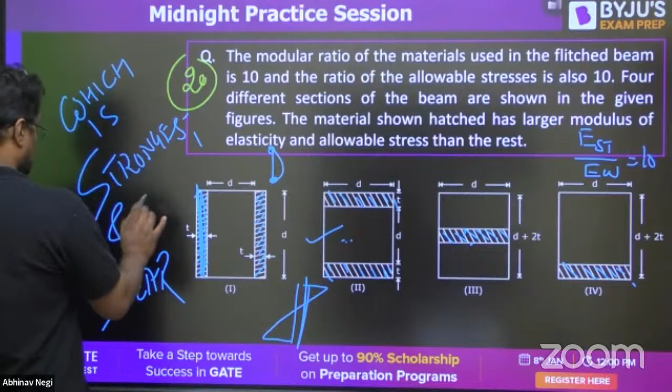Here for bending, this is the best - which is strongest in bending. Let me tell you one more thing: even if it is not mentioned which is the strongest, and the word 'beam' is mentioned, then for a beam the primary stresses are always bending. If it is not mentioned bending or shear, we will give the answer for bending. Please remember this for the exam.